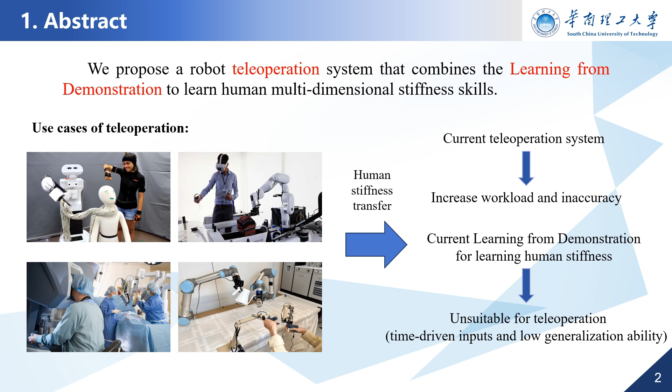This is the framework of our proposed system. It consists of two main parts. One is the human stiffness transfer module. The other is the robot teleoperation module. As for the human stiffness transfer module, a teleoperation-oriented stiffness adaptive Gaussian mixture model and Gaussian mixture regression, or TOSA-GMM/GMR, is proposed to transfer human multidimensional stiffness skills to robots.

As the stiffness is computed and analyzed on a Riemannian manifold and reference points are introduced, our method exhibits higher accuracy and stronger generalization capability. In order to cooperate with teleoperation, the robot stiffness is dynamically adjusted based on the initiative of operators.

As for the robot teleoperation module, a variable stiffness torque controller is employed to ensure accurate tracking performance. Additionally, a single-leader dual-follower teleoperation strategy for flipping manipulation is designed based on task modeling. The operator can control two robot arms with a single-leader device to perform flipping objects, thereby reducing workload and improving efficiency.

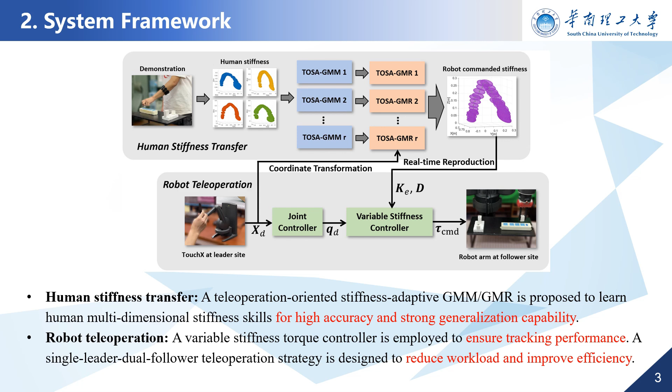For the TOSA-GMM, the demonstration data, y, is concatenated by the position vector, x, and the stiffness of the human arm endpoint, kh. To enhance generalization, it is necessary to process the demonstration trajectories based on multiple observations. We select a set of reference points in the task environment, then transform the demonstrations from the base coordinate system into the coordinates of these reference points using equation 2. Hence, the proposed TOSA-GMM in the coordinate system of the r-th reference point is given in equation 4.

The stiffness of a human or robot arm is represented as a symmetric positive definite matrix, so stiffness should be computed in Riemannian space instead of Euclidean space. To address this, we modified the GMM by transferring the calculation of the difference between the demonstration data and the centers of the Gaussian models from Euclidean space to Riemannian manifold space, as illustrated in equation 3. Furthermore, the parameters in equation 3 can be determined by the expectation maximization algorithm, which aims to maximize the log likelihood function of equation 4.

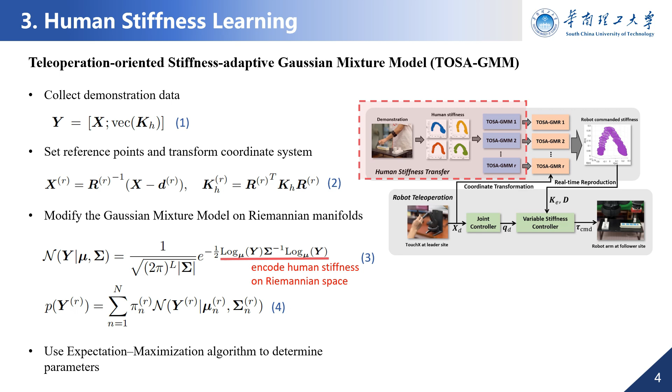In the process of teleoperation, the TOSA-GMR is employed to reproduce the robot stiffness sequence based on TOSA-GMM. Instead of conventionally using time as the input, we use the position of the robot arm's end effector, xi, as the input. This allows the reproduced stiffness to adapt based on the user's actions, rather than being determined solely by the passage of time. Consequently, the reproduced data, its center and covariance can be written as equation 5.

Hence, the TOSA-GMR in the coordinate system of the r-th reference point is formulated as equations 6 to 10. Finally, we fuse all the reference points as the actual output stiffness by the weighted Karcher mean algorithm.

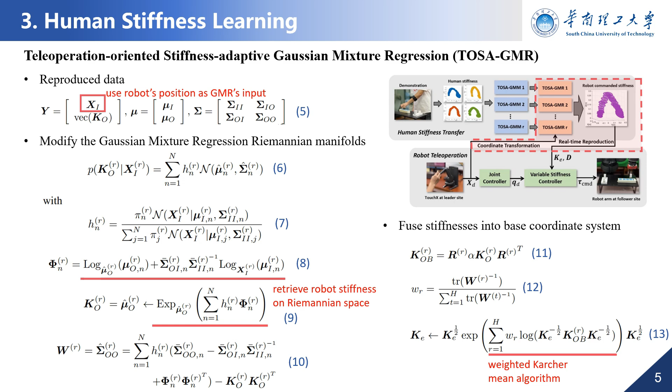For the robot teleoperation module, when performing conventional tasks, we employ single-leader single-follower teleoperation wherein the operator controls a single robot arm to perform tasks using a single-leader device. And a torque controller with variable stiffness is proposed in joint space as equation 17.

And for cooperative tasks like flipping objects, in order to lessen operators' workload, a model-based strategy of using a single-leader device to control dual robot arms is proposed. Additionally, the torque controller 17 is employed in this teleoperation strategy as well.

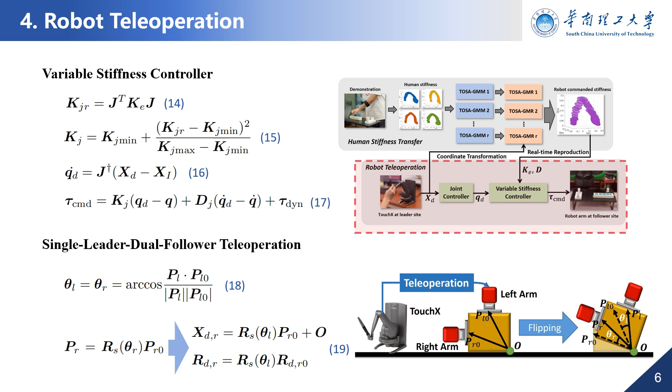We validated our proposed system by performing two tasks: an electrical socket plugging in task and a continuous object flipping task. Here is the electrical socket plugging in task. In the demonstration stage, the human tutor was required to conduct the plugging in task 4 times, wearing a Myo armband on the left forearm, while the Kinect tracked the tutor's hand on the opposite side.

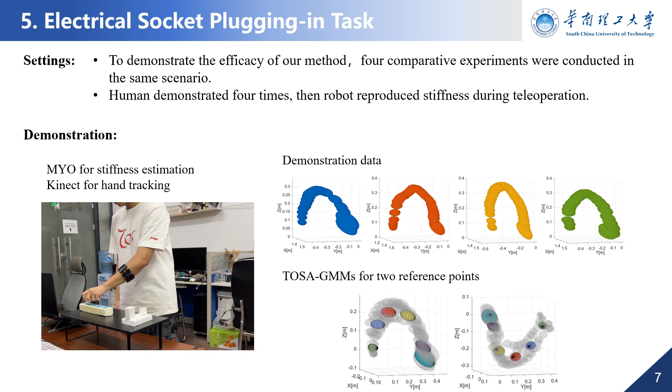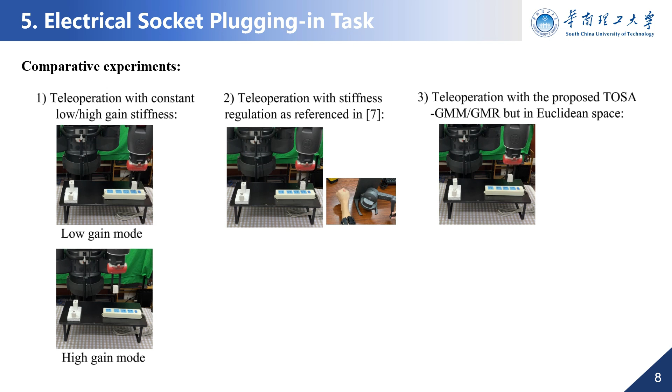We set the start point and the goal point as reference points and used the TOSA GMM with 6 Gaussian components to fit the demonstration data. In the teleoperation stage, we conducted 4 comparative experiments in this task. The first is the teleoperation with constant low or high stiffness.

When using the low gain setting, the adapter failed to be plugged into the socket. When using the high gain setting, the task was successfully completed. However, the contact force was too high, posing a risk of damage to both the robot arm and the adapters.

The second is the teleoperation with stiffness regulation, as referenced in an existing method. This method required the operator to wear the Myo armband and controlled both the robot stiffness and position. We invited 8 volunteers to perform the task.

As a result, some volunteers were unable to complete the task, and the average completion time for those who succeeded was long. But with our proposed method, the average time cost reduced, and only 1 volunteer failed to finish the task due to lack of proficiency in using the TouchX.

The third is the teleoperation with our method, but in Euclidean space. The reproduced stiffness ellipsoids exhibited apparent deformation around the start and goal points, indicating lower accuracy and generalization ability compared to our proposed method.

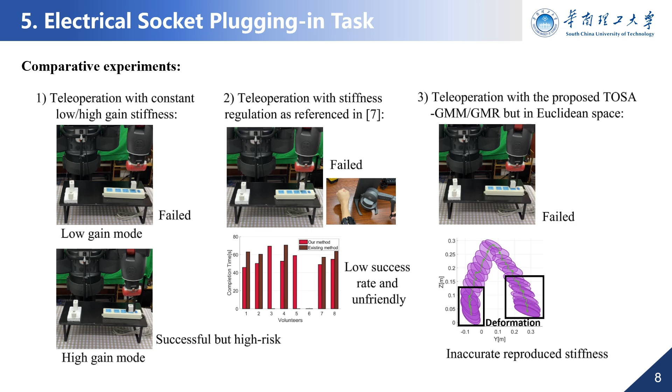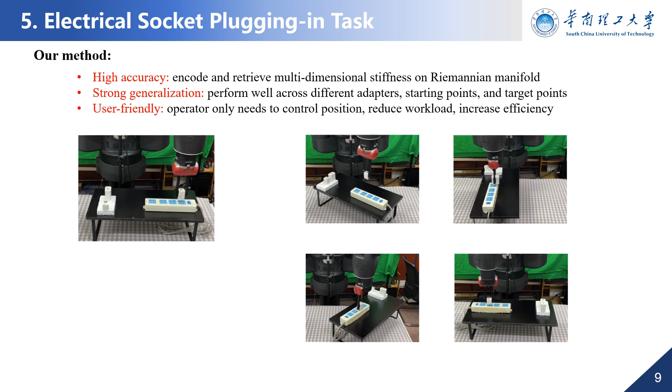When using our method, it showed high accuracy, strong generalization ability, and user-friendliness. Our proposed system showed high accuracy by effectively encoding and retrieving multi-dimensional stiffness on a Riemannian manifold. It also demonstrates strong generalization, performing exceptionally well across various adapters, starting points, and target points.

Furthermore, it is designed to be user-friendly, allowing operators to simply control the position, which reduces their workload and significantly increases overall efficiency.

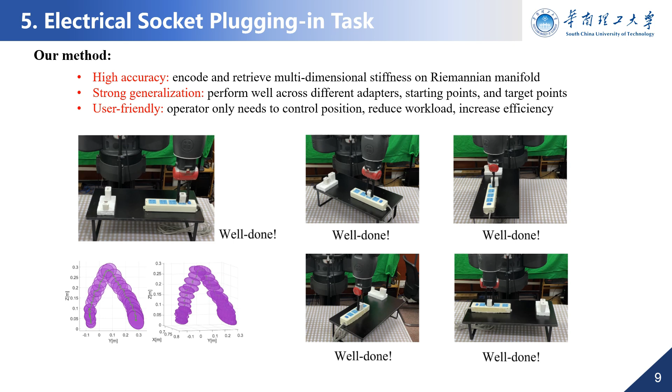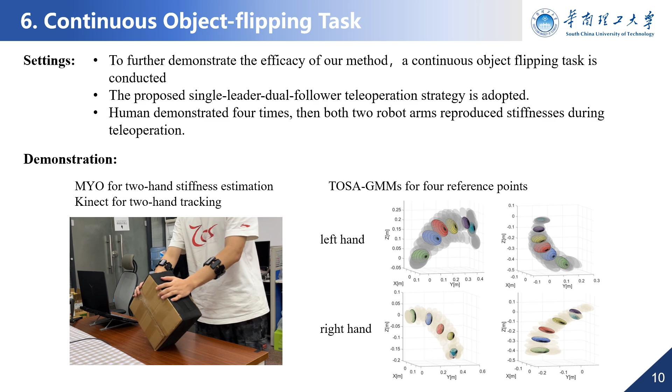To validate the generalization of our method, we performed 4 continuous flipping tasks. Boxes with different weights and shapes were used as the objects to be flipped. In the first row, for the task of flipping a 7 kg cubic box, the operator completed the first flip, and then used the button of the TouchX to set new reference points before the second flip.

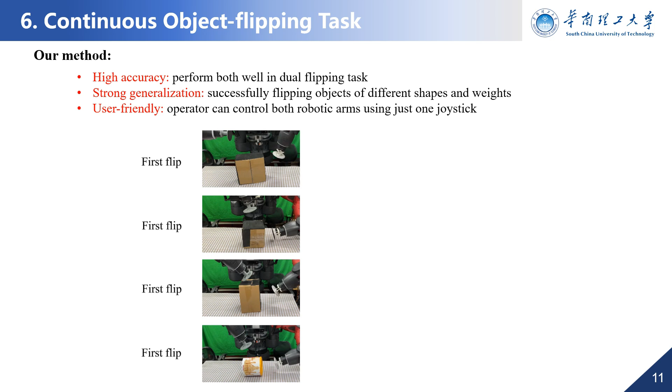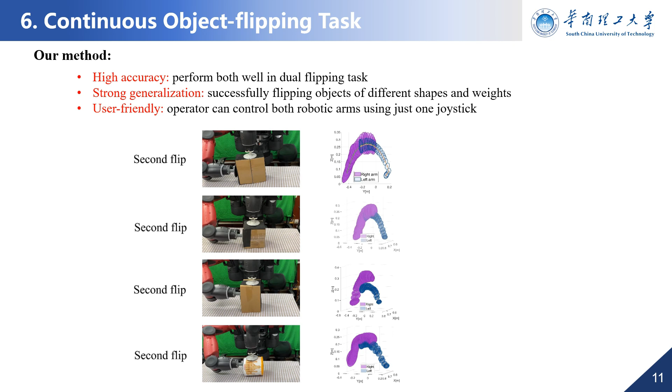The remaining 3 additional experiments were conducted with small cube, cuboid, and cylinder-shaped boxes, respectively, further validating the effectiveness and generalization ability of our proposed method. It showed high accuracy, performing exceptionally well in dual flipping tasks.

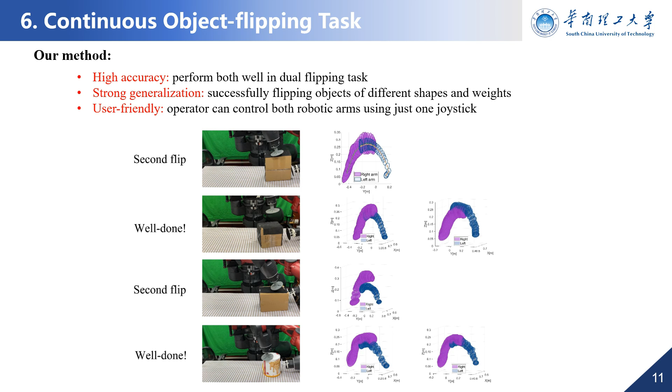It demonstrates strong generalization by successfully flipping objects of various shapes and weights. Additionally, it is designed to be user-friendly, allowing the operator to control both robotic arms using just a single joystick, simplifying the operation process.

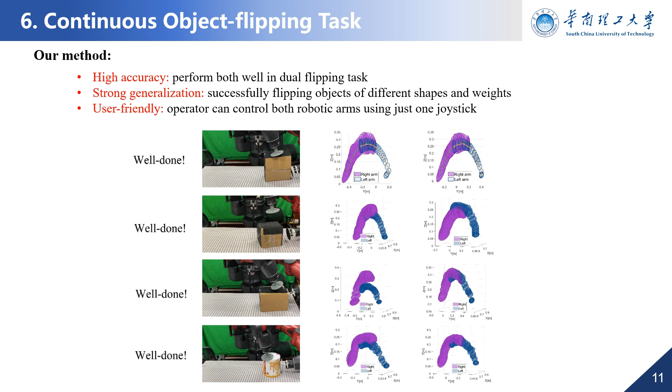Hence, according to the results of the aforementioned experiments, the TOSA-GMR, which transfers human multidimensional stiffness skills to robots, can improve stiffness adjustment accuracy, enhance generalization, and it is more suitable for teleoperation.

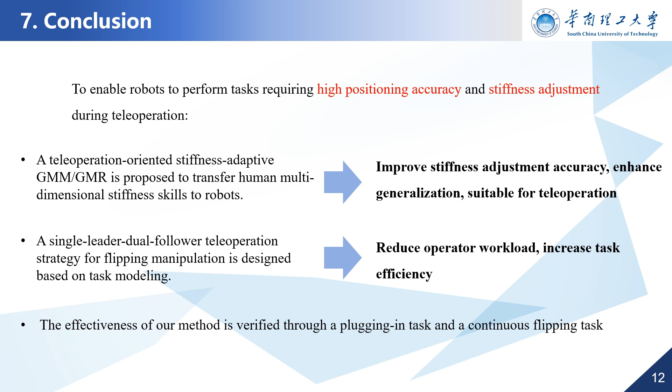The single-leader dual-follower teleoperation strategy for flipping manipulation can reduce operator workload and increase task efficiency. We can conclude that our proposed system is capable of performing tasks that demand high positioning accuracy and stiffness adjustment. This is all of our research.